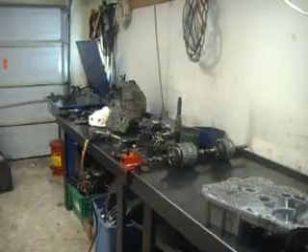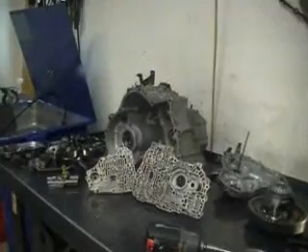Alright guys, what we got here is a Honda V6. It's a B7TA. I'm going to show you a couple of things that are associated with this unit, the most common problems and all the headaches that this unit will cause if it's not cleaned and assembled correctly.

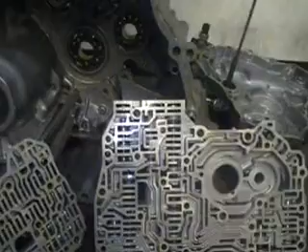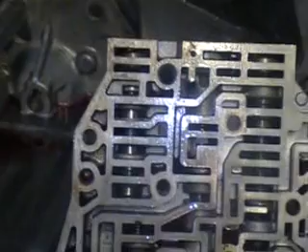To start with, we see the valve body here. Well, first let's look at the bottom of the unit. It's very dirty. Now this vehicle had erratic shifting. It had harsh reverse engagement. We see here that the reverse clutch pressure control valve, it's all bottomed out. That's why we had the harsh reverse engagement. Now it was shifting from first to second sometimes, and sometimes from first to neutral, and then it would neutralize.

We have the clutch pressure control valves, the A and B. We get a little bit closer. One is completely bottomed out in the bore. You can see here that it's supposed to be against the end plug. And this one here, you see this part of the spring. Both of those valves are stuck. You have the main control valve body here already with the valves out that were stuck.

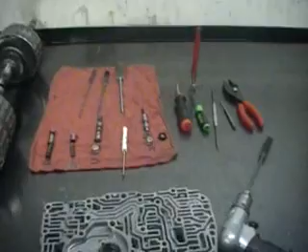We're going to use this little brush here on a high-speed drill. They're called Bench Buddies from Superior. They're actually valve bore polishers. So what we're going to do here, we're going to go ahead and polish the bores from where those valves came out from. They were very stuck, and they should fall in by itself.

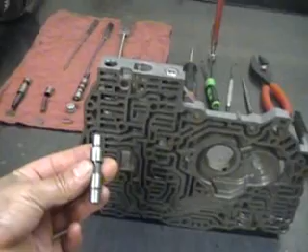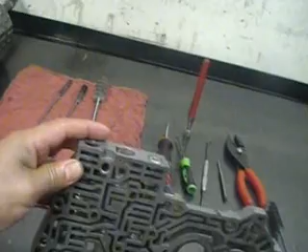Now you remember this valve. This is the reverse clutch pressure control valve. It should drop by itself on its own weight. That's how free these valves should be. And always test them without the spring. See, I have the spring still over there in the rack. Always test your valves without the spring and make sure they float freely and they fall by themselves on the inside the bore.

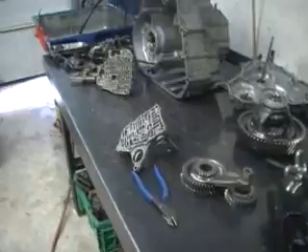Now this is our lockup shift valve, all the way inside into the bore. Nice and free. And you do these on all the valves that are stuck. We're going to do it on the rest of these valves and the clutch pressure control valve.

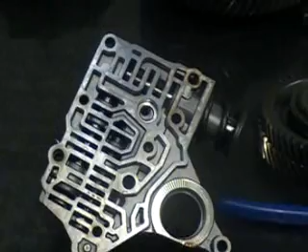And then we're going to concentrate on the pressure regulator valve, and this is the most common problem with this unit. If you get blue converters or real burnt fluid after overhaul, or if you receive a unit like that with a burnt or blue converter, completely melted, this is the problem, and I'll show you why.

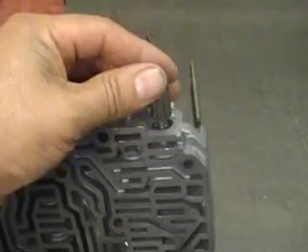This is the relief valve. There we go, bottomed out. And here we have our modulator valve. There we go. Fell all the way down into the bore.

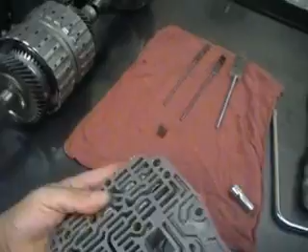And now our clutch pressure control valve B and clutch pressure control valve A. B and A.

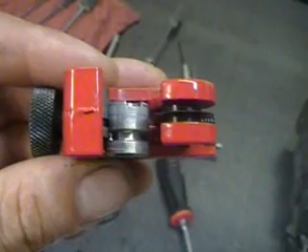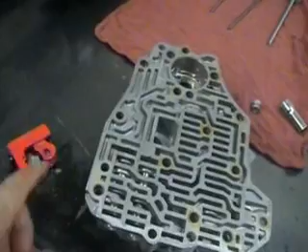Another thing I need to bring up to your attention: use your tubing cutter to cut a little groove in it. This will help when you put this end plug back in the bore. It's going to help it seal, and so you won't have any fluid blow by. Especially in all the valves that the spring is on the opposite side. If you have the applied circuit against the end plug, then it is very recommended that you do that. Cut a little groove in it, and that'll help you seal the end plug in the bore.

It is very important that you torque your bolts. Do not use an impact wrench. We're going to torque this at 9 foot-pounds, and these 3 other bolts, we're going to torque them to 13 foot-pounds.

Have the main pressure regulator valve. See how I have this valve body like this, this valve should have already dropped out, and it's very stuck. This is the reason why we had a lot of damage in this unit, and we had a blue converter in this unit as well. I'm going to try and get this valve out, and it is very, very stuck.

It's taking a little bit of force to get it out. There we go. Here it is. This is what causes most of your problems. I'm going to show you the hydraulic diagrams for this unit, and I'm going to explain to you why this is very important, that this valve should be free.

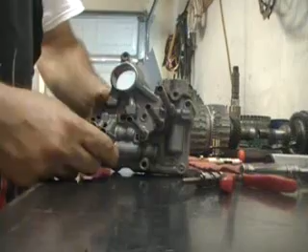And another thing I need to mention is that these two bolts right here, they go here on the side of the valve bore. I know a lot of builders, they like to use the impact wrench to tighten all the bolts. That's why I said that it is very, very critical and very important that you get your bolts in with your speed handle and torque them with your torque wrench. Basically, it's like 9 pounds, 8.4, 8.7 foot-pounds, or 108 inch-pounds. 9 foot-pounds is good, 108 is good on all these 10mm bolts.

Do not over-torque these two bolts, otherwise you're going to create this problem. The valve is going to be closed shut, and you're not going to have any converter charge. Here you can see a little cutout. Now, and in the front, you have a little hole.

Now, when you first start the engine, line pressure goes into this port. It goes to the front of the valve and starts regulating until this little notch allows the fluid to charge the converter. Now, if this valve is very hung up and it's in the closed position, you're not going to be able to get this valve to move to open the converter charge circuit, and you're not going to have any converter charge at all.

And what's going to happen? Well, your converter is going to burn up. It's going to turn blue. It's going to overheat.

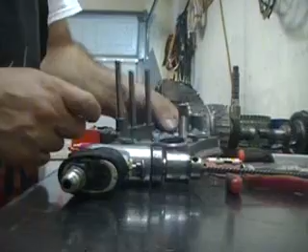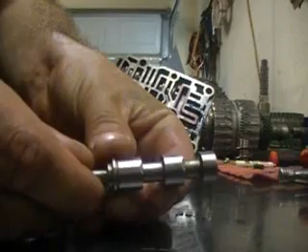Now here's the valve. Let me see if I can get it to where you can see the two lands. The cutouts here are for line to converter charge, and then you have line to lubrication — two little cutouts here, one here and one here. Now the line to converter charge is larger than the line to lube, since converter charge is more important. And then you have the little hole in the front.

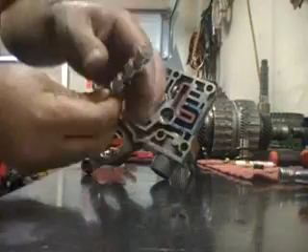So with this valve in the rest position all the way into the bore, you have line, and you have the lube circuit cut off, and converter charge cut off. Now when you first start the vehicle, line pressure will move the valve, and it'll open both circuits — the converter charge circuit and the lube circuit. Both circuits will be open.

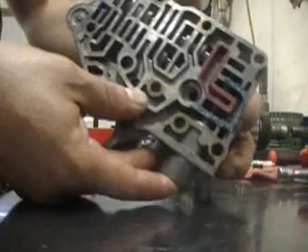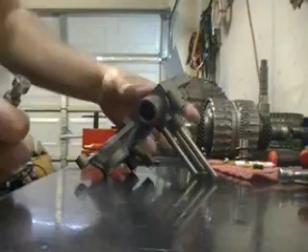Now, just as a preventive measure, if you have a drill bit that's the same size as this hole — I've done this before and it works very well — you can drill a line to converter charge hole in there, which I have already done. I have the little small drill bit, and I drilled the line to converter charge hole circuit already. You see there.

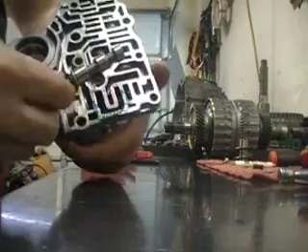This is just a preventive measure, just in case it gets overheated and hung up. But as you see, the trouble that we had getting this valve out, and how easily it drops in and falls off the bore — this valve is pretty free.

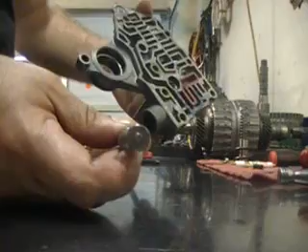Just to let you know, this is line to converter charge. You don't have to drill a line to lube, just line to converter charge. This is just as a preventive measure. Like I said before, very small drill bit, the same size as the one in the front of the valve — or if you have a 40 thousandths drill bit or a little bit smaller, that would be perfect, as long as you have some flow going to the torque converter. This will fix the converter charge headache that's been going on since the late 90s up till today.

Okay, well, there's our finished product here. It's already completely assembled.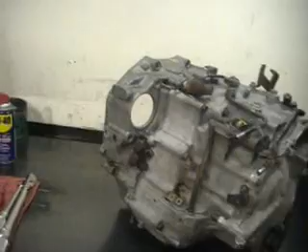Now these are just some basic tools that are very necessary and important for a successful rebuild on this unit. These are the bench buddies — they come in a set of 4. I just use this one for this transmission. But it's very important that you clean your valve bodies thoroughly. There are no shortcuts here — you have to remove the valve from the bore, polish the bore, clean the valve, reinstall it.

Reinstall the valve without the spring if it takes a spring before the valve, and just make sure it strokes all the way to the bottom and falls out of the bore freely on its own weight.

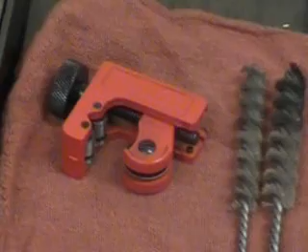I'm pretty sure everyone has one of these — it's a tubing cutter, regular cheap $5 tubing cutter. That's to make that little groove on the end plugs.

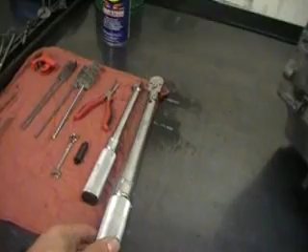Mini needle nose to pull the valves out of the bores, and I have 2 torque wrenches here plus a digital one that I used before. This is a regular foot-pounds, and this is an inch-pounds torque wrench.

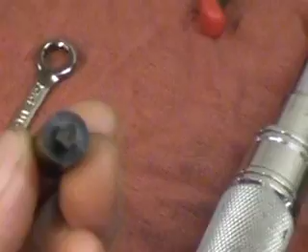This little gadget here, this little tool, is to adjust the linear solenoids. If you just want to adjust a half a quarter turn, that's the little wrench that goes in the back, and the front of it is like a pentagon — 5 sides. I'm a little too close here, let me pick it up. See, it's 5 sides, and you actually adjust linear solenoids with it.

They're already installed, but they have an adjustment in the front, so you adjust them if you have low pressure in the shifts. And of course, your regular flathead screwdriver and the usual picks that you would use.

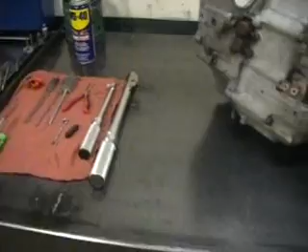Now what we're gonna do here, we are gonna go through some real research about it. I know that it's not just easy to throw things out there.

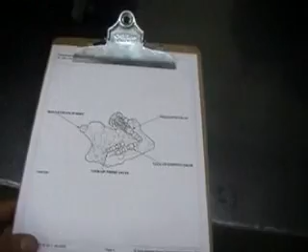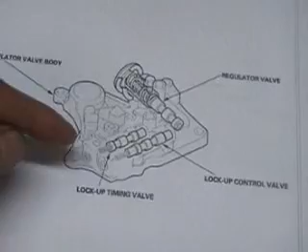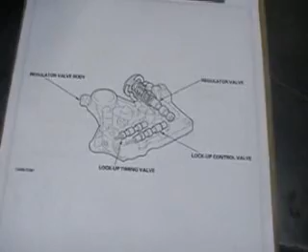This is identifying the pressure regulator valve body. This is our pressure regulator, this is our lockup control valve. On this one it was stuck, so I got it out of the bore, polished the bore, and inserted it back in. This is the lockup timing valve, this one was free. This is anodized aluminum, and this is a steel valve. For some reason most of the steel valves get real hung up, and the aluminum valves stay nice and free. But we went ahead and removed all of them, inspected them, cleaned and polished the bores, and reinstalled them into their respective bores.

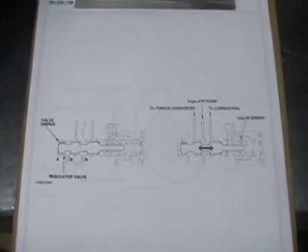Now a lot of research was done here in order for me to bring up this information. What I've been noticing on every single one of the transmissions that come in with the overheated torque converter, they get blue, they actually get cherry red and the metal gets blue. I'm pretty sure you've seen those converters come into your shops.

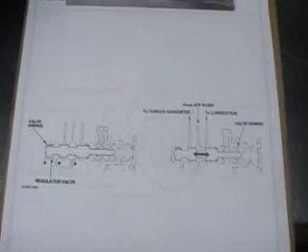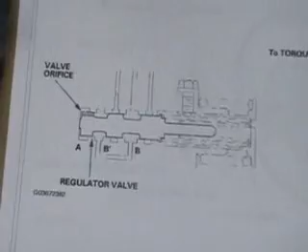I would always notice that the valve body was over torqued, way too tight. Most of the bolts are just way too tight, I've seen some stripped threads on it. Maybe whoever built it used an impact wrench, and the pressure regulator valve gets stuck closed. On some occasions it's just normal wear and tear, and the transmission is very dirty, never got serviced, and this valve would get hung up also in the closed position.

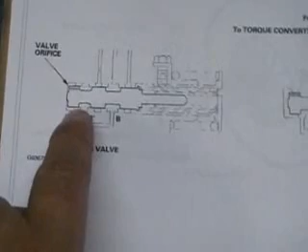Now this picture that we're looking at, this is the pressure regulator valve, and this is the valve orifice. It has the little hole that I'll show you, and then you have line going into these two ports right here where the B is at. Now this is if the engine is off, this is the way the valve would be, right against the wall, bottomed out.

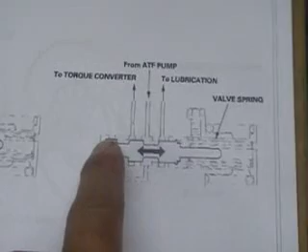But once you start the engine, see how the valve is away? Now we got from the ATF pump, the fluid goes in here in this port, and it goes to this other port over here. It goes into the hole in front of the valve, and it opens the valve just enough so that you can have converter charge and lubrication. And here in the back you have the valve springs, two inner ones and one large outer one.

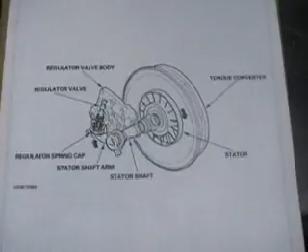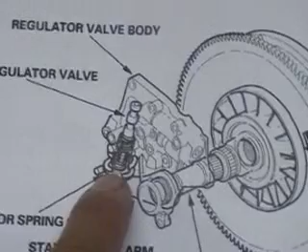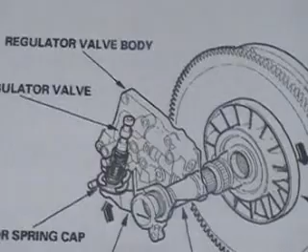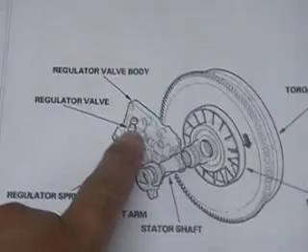Now here we see the rotation of the torque converter multiplying torque. We have the stator, and then we have the lever that goes up against the back of where all the springs go. So whenever you accelerate the vehicle, it pushes the valve towards the closed position. This is the way it's regulating. You got line pressure holding against it, holding it open. And when you do a kick down or force it, the converter starts to multiply in torque, pushing the valve to the closed position so you can have the proper pressure during all your upshifts.

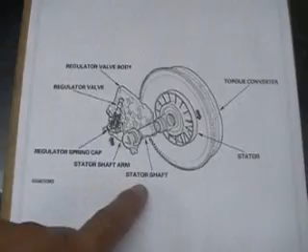We have the regulator spring cap, the stator shaft arm, and the stator shaft, the regulator valve, and the regulator valve body. Right now we're just identifying all the different components.

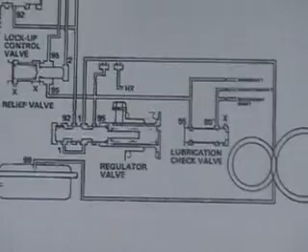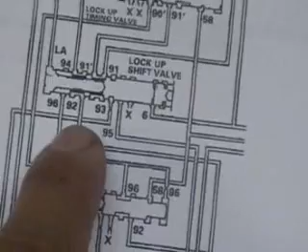Now let's identify the lockup control system. Here we have again the pressure regulator valve. You see that it's not against the bore, it's in the regulating position. Remember that little cutout on the land that I showed you? The valve is regulating, but it's allowing fluid to go up into the torque converter, and it goes all the way in.

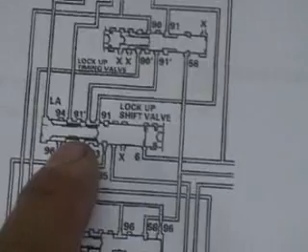Now I think I went too fast here a little bit. So it goes to the lubrication, this is the torque converter charge. It goes to the lockup shift valve, and there's an open land here. It goes through the valve and works its way up into the converter. This is converter charge.

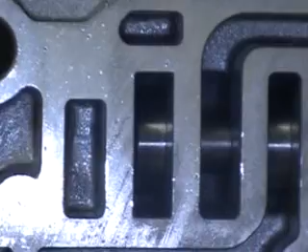So in review, just pay attention to this valve. As long as this valve is not stuck shut like you see here - well, it's shut because the engine is not running and I have it off the transmission. Valve is shut. This is line pressure. It goes through the hole on the valve and pushes the valve open. You have the little land that has a little cutout.

This is the lube circuit - no wait, this is converter charge, and this is the lube circuit. So like I said, you don't have to drill line to lube, but if you want to be on the safe side, you can create a leak between line and converter charge. You want to fill this converter charge, you can drill here, here, or here, it doesn't matter. I drilled up here. This is line, what it looks like is a horseshoe - that's line pressure, and this little angle here is converter charge.